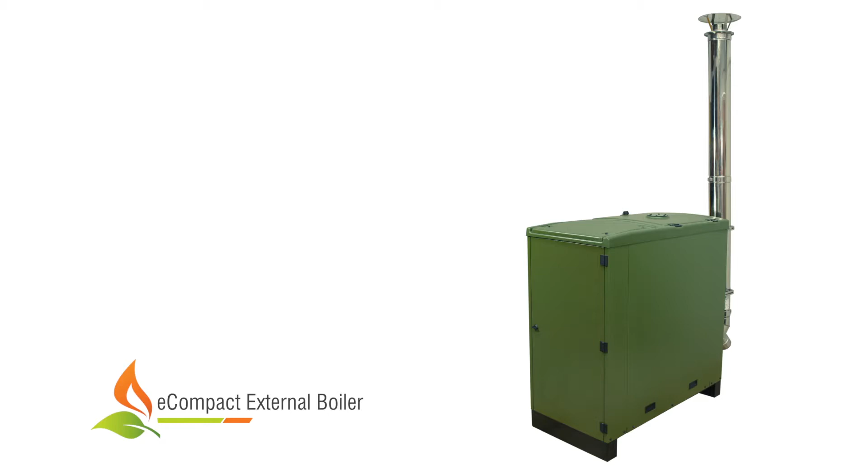Even greater range of models, i.e. 15-18 in slim models and 15-18, 28 and 40/45 kW S models. Several thousand external boilers have been supplied from WES's factory to the UK and Irish market, making it the undisputed leader in this field. eCompact, the original and the best.

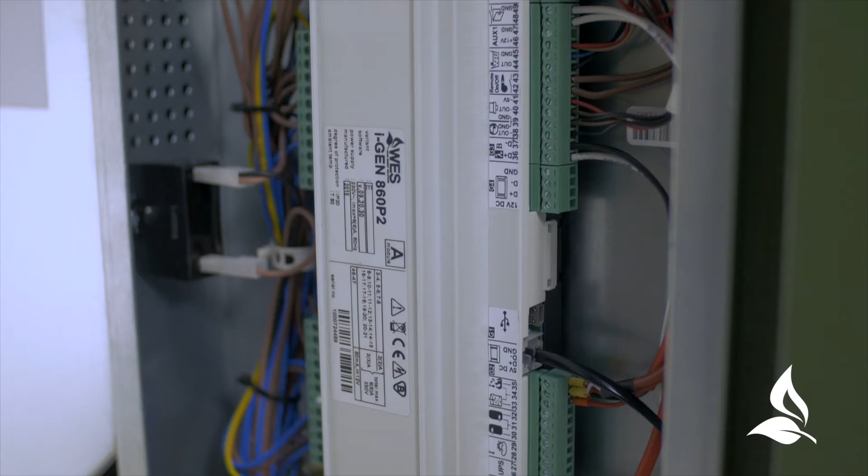This video describes the installation of the external 15 kW, but the same principles apply to all internal and external models, and the controller and key components are exactly the same on all domestic models.

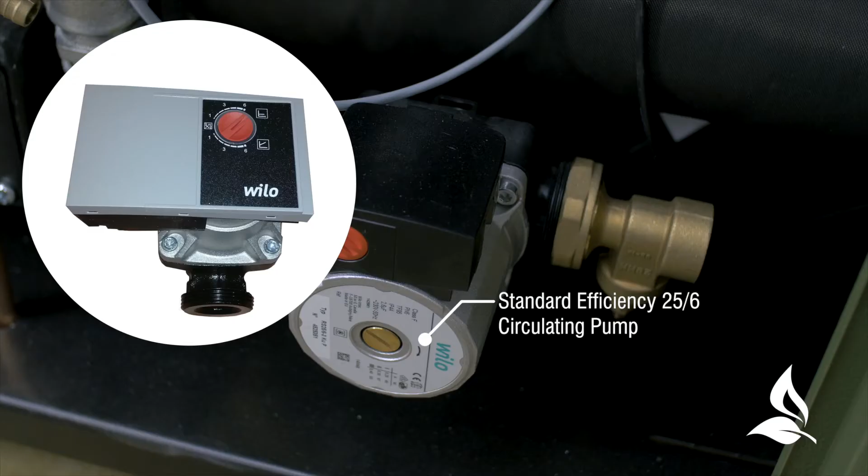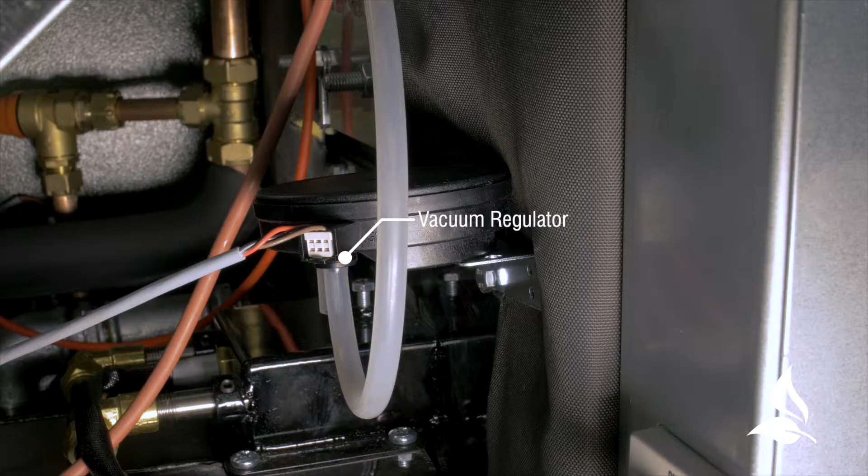Unique new features on the external iGen are easily removable side panels, easily accessible control board enclosure, a new ERP energy efficient Wilo variable speed pump as standard from August 2015, flow and return connection pipes that can exit through a knockout in the base, unique compressed air cleaning system, a vacuum regulator which ensures negative pressure is maintained in the combustion chamber. All wiring is heat resistant and sleeved.

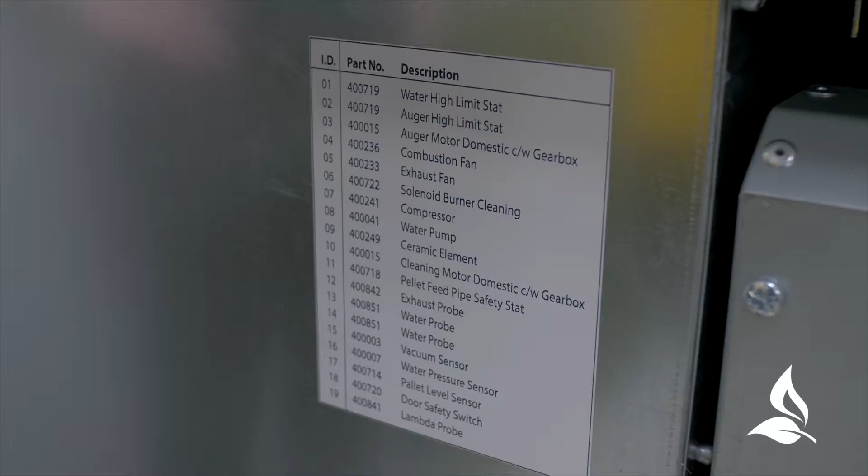Also, all components are joined by push-on connectors. An index of all key components is on the side of the boiler, making it easy for the installer to identify each component. Behind the easily removable control board enclosure is the PAT Test QC control label.

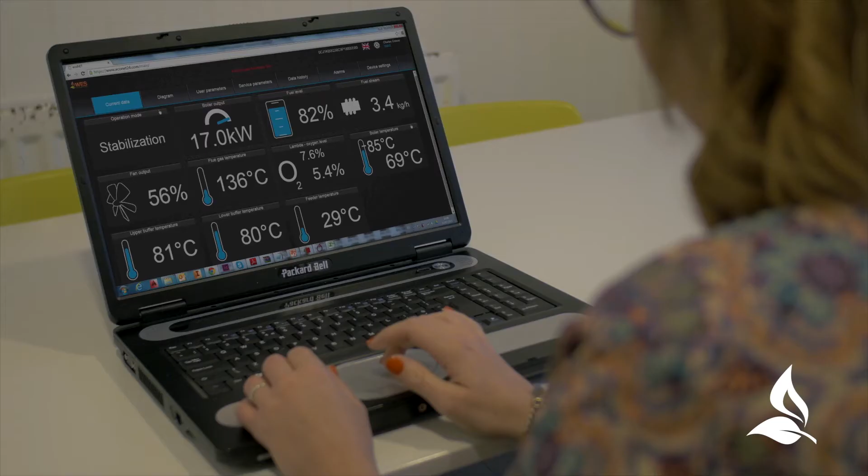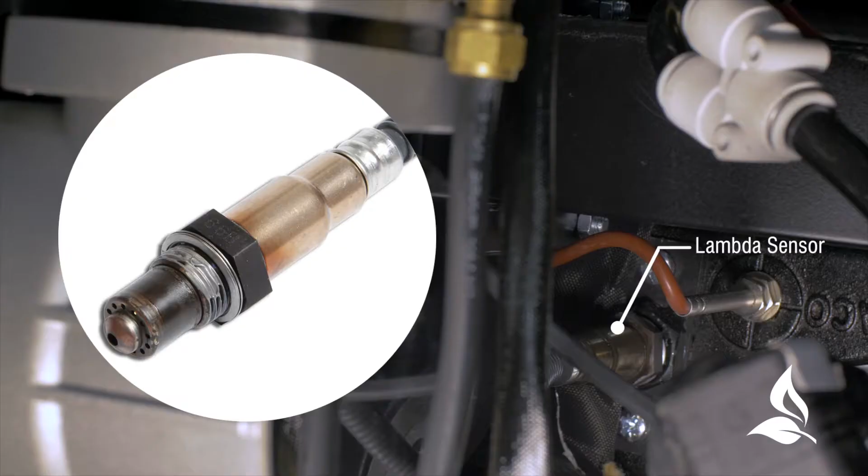Wi-Fi is standard on all models, enabling remote access for the homeowner, installer and manufacturer. There is no need for static IP address or to run Cat5 cable to the unit. All that is needed is Wi-Fi coverage in the boiler vicinity. All eCompact boilers have lambda sensor and controller as standard, ensuring even greater efficiency and quality combustion.

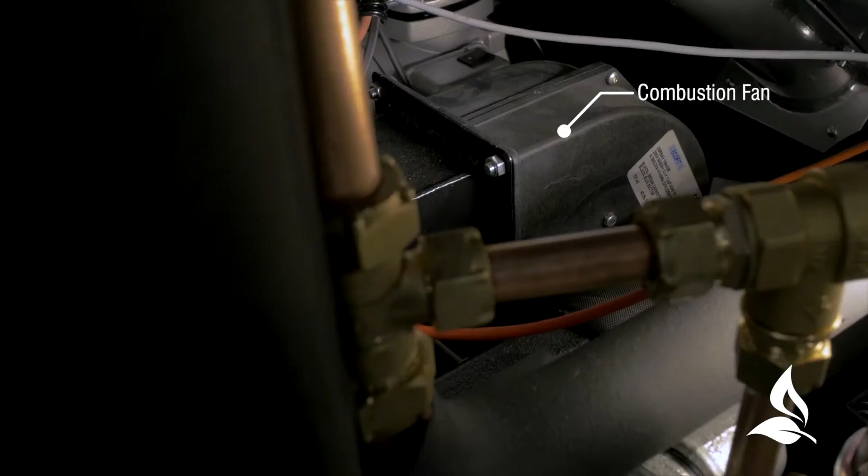A pressure relief valve fitted as standard and plumbed. Water pressure sensor which alarms if water pressure is less than 1/4 bar and exceeds 2 3/4 bar pressure. Combustion fan ensuring greater quality combustion compared to single exhaust fan systems.

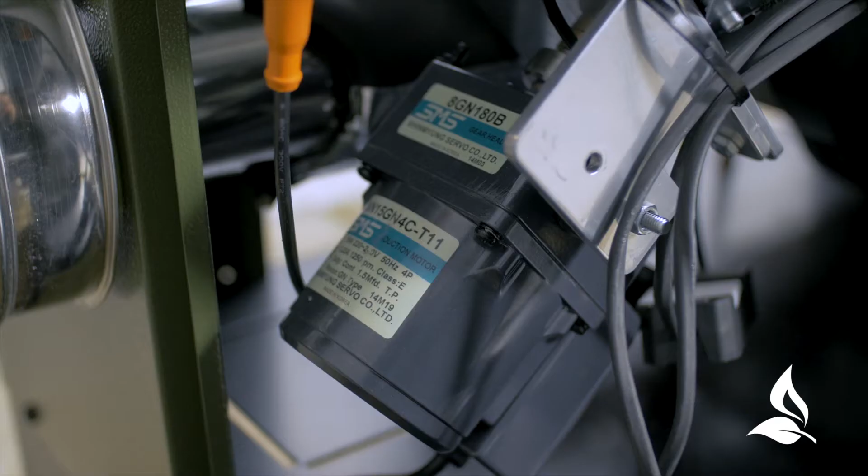Here you can see the temperature probe that measures the exhaust gas temperatures as it exits the boiler. Here is the auger motor that drives the auger flight. Each boiler is identified by a unique serial number which is located inside the front door here.

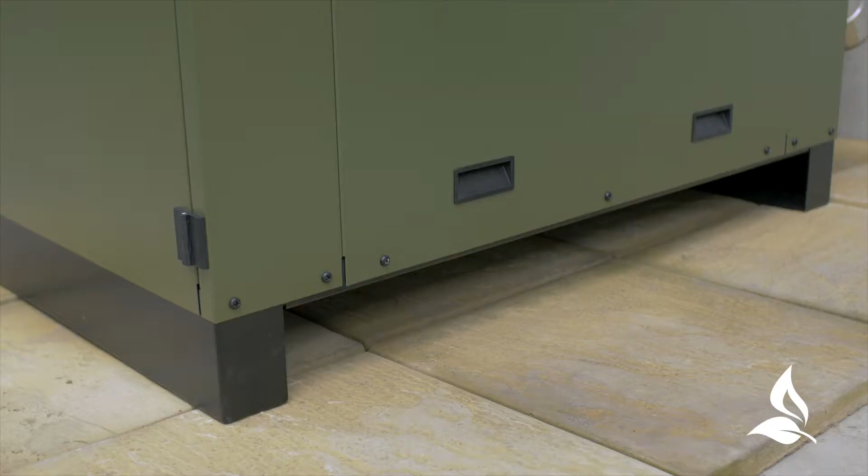Weatherproof louvers on the rear of the boiler allowing combustion air access to the unit. Air intake under base and on rear panels giving the eCompact an even greater IP rating. All external models have the patent pending moulded ABS lid with removable spigot for an external auger, enabling eCompact external boilers to be used with bulk fuel storage systems.

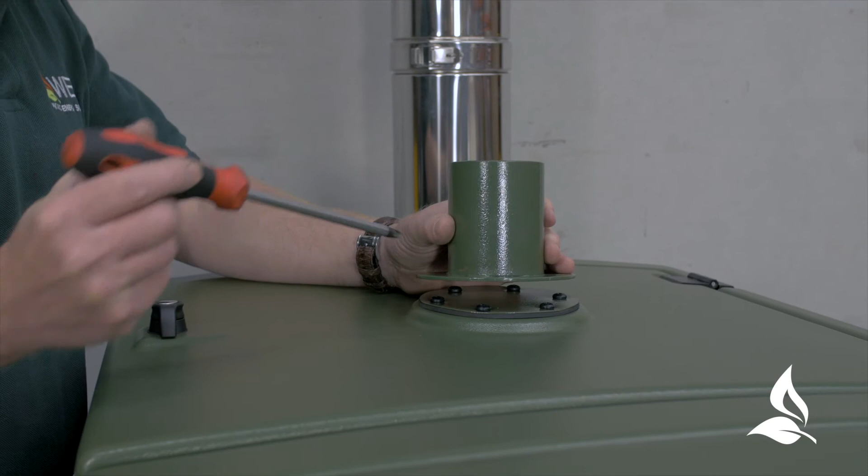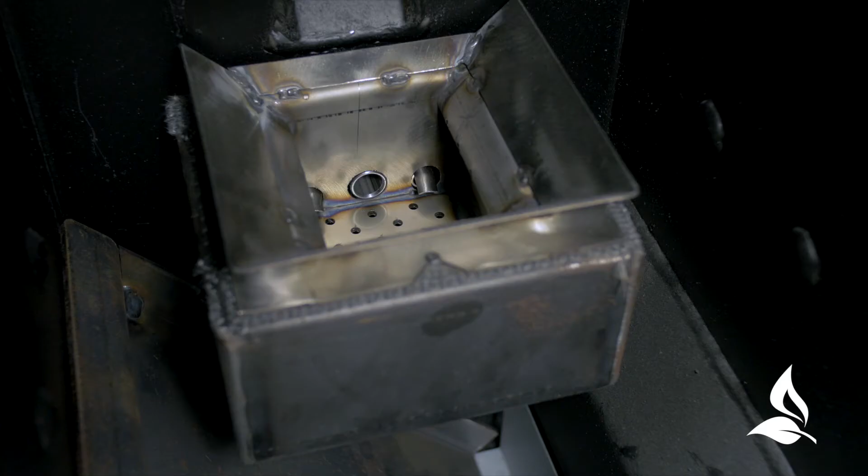Relays are factory fitted to enable an external auger to be used. Relays also allow the property's existing time clock to be used. Stainless steel safety mesh guard. Boiler on a skid base to ease transportation on site. Greater number of cleaning pipes in burner and extended cleaning time. Exhaust pipe is insulated. The main electrical connection is easily made, and provision is made in the base to bring in the electrical cables.

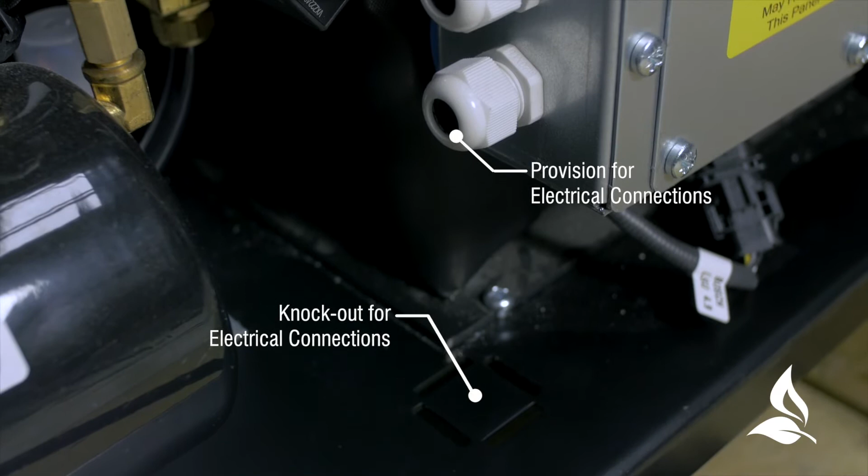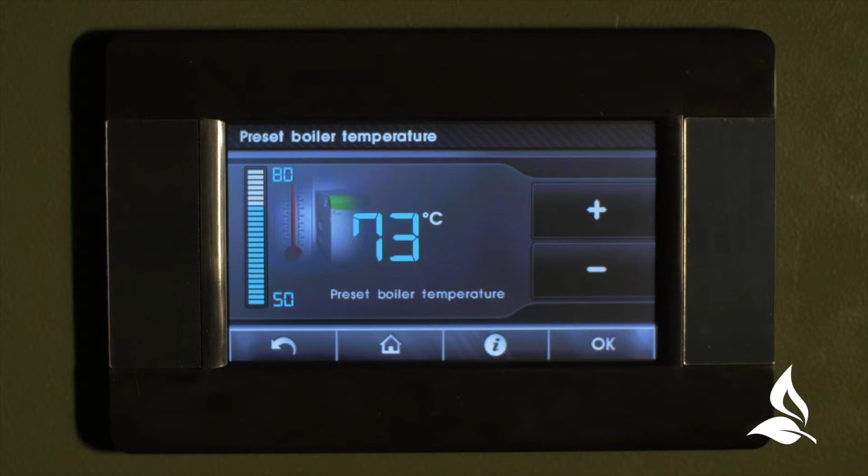iGen controller is standard on all eCompact boilers with its touchscreen easy-to-use graphic display. The iGen controller uses fuzzy logic PID control, meaning it modulates seamlessly within the range of 100% to 30% of the boiler output. Commissioning process is therefore greatly simplified. All boilers are PIN code protected only at installer and manufacturer levels to access service parameters.

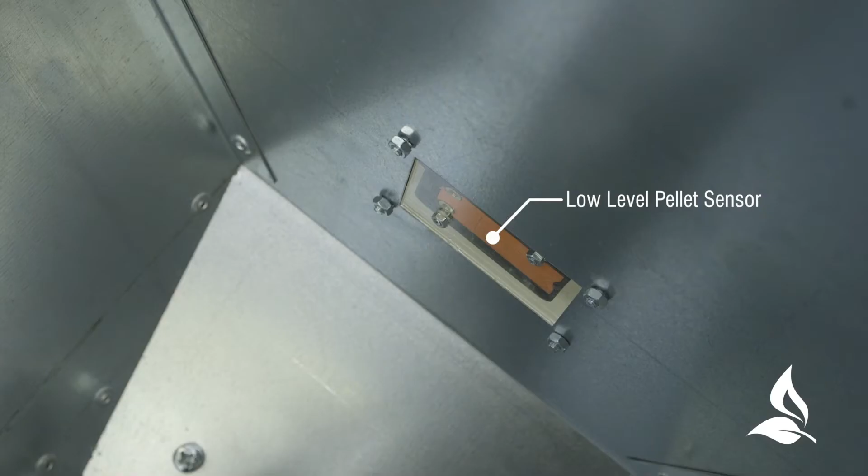iGen control module can also be sited in the property, meaning the homeowner can control the boiler from within the house. This will show the operating status of the boiler, fuel level and control heating circuits within the property. Within the hopper you will find the low-level pellet sensor and the auger flight. On opening the lid over the boiler, one will find the boiler cleaning motor and the automatic air vent.

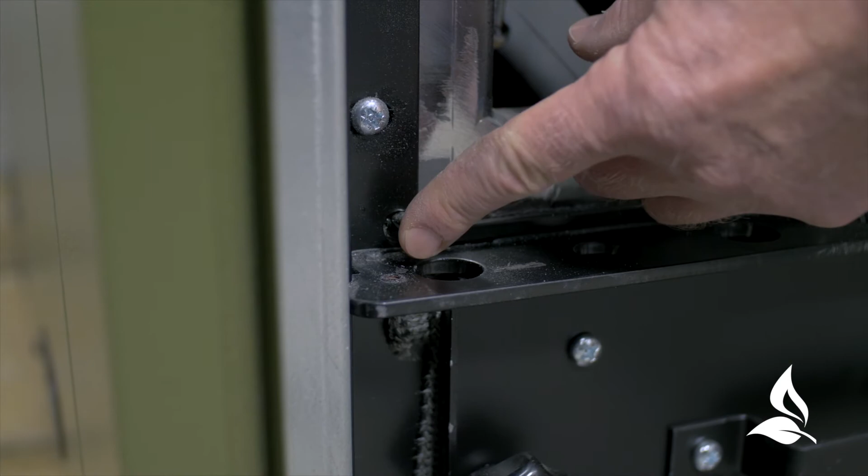On opening the front door of the boilers you will notice an additional safety catch that needs to be opened on the combustion chamber door. This is in addition to the existing electronic safety switch. You will notice the burner pot and grate which is manufactured from stainless steel. A generous ash pan is located at the bottom of the combustion chamber and a pan for collecting the debris after cleaning the heat exchanger.

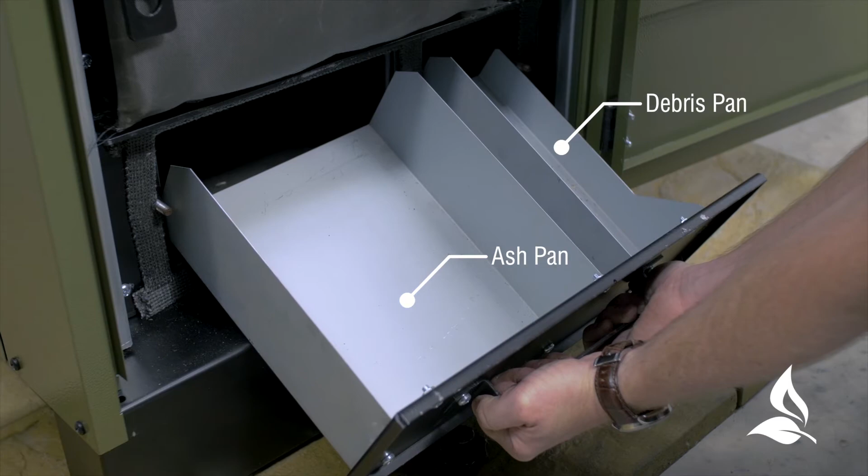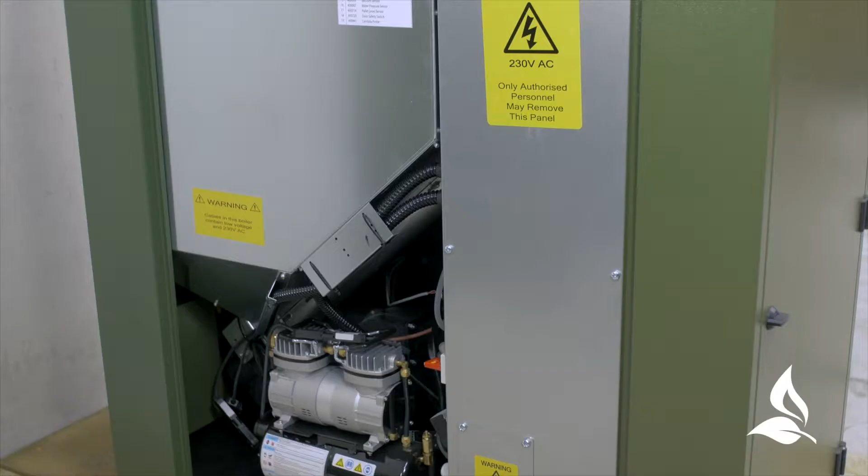The installation of the boiler, making the electrical connections, checking its operation and maintenance are all tasks which will be carried out by qualified and authorised personnel. It is important that the installation manual be read in conjunction with this video. So you can see, the eCompact iGen is one of the best designed biomass boilers on the European market today. Industry-leading components are used throughout.

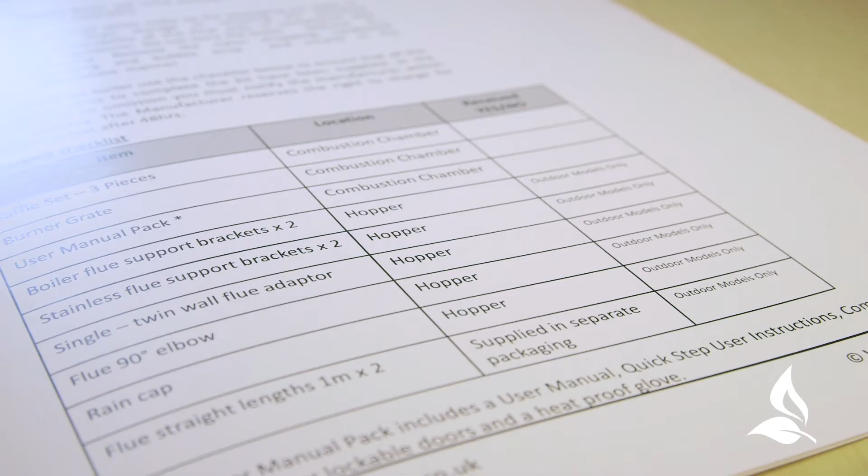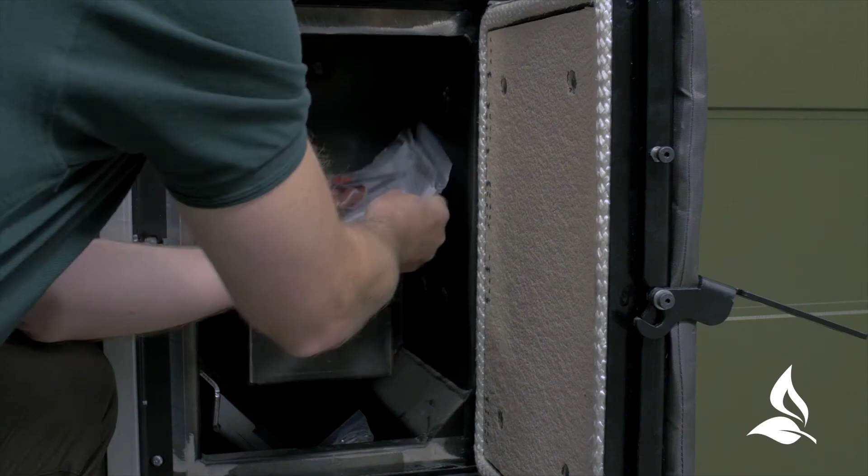Unpacking. Your eCompact boiler is supplied on a single pallet and the materials which make up the packaging are 100% recyclable. Check the unpacking checklist in the manual to ensure you have all the required components: 3 baffle plates on a 28 kW boiler, 1 baffle plate on 15 and 18 kW models, user manual pack, burner grate, etc.

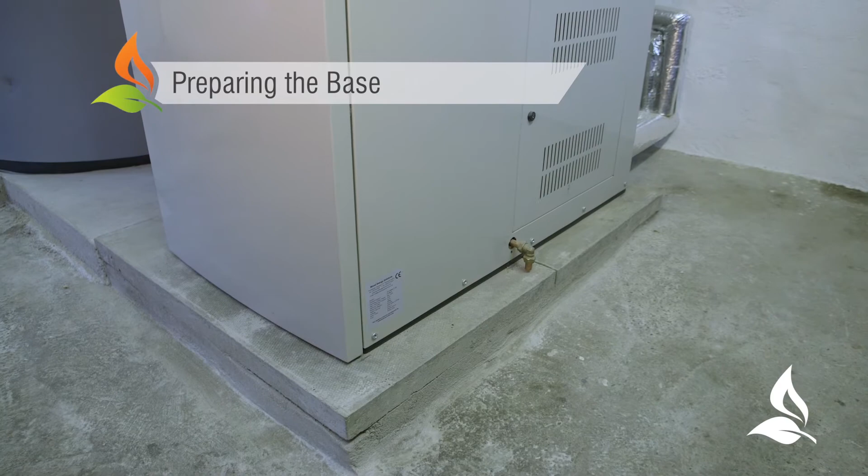All eCompact domestic boilers are designed to fit through a standard door width. However, they do need careful handling, and you will need manual handling equipment. For example, the 28 kilowatt model weighs almost 200 kilograms. Preparing the base. For internal boilers, there is already likely to be a non-combustible concrete or tiled base in the plant room where the unit is to be placed. For external boilers, it may be necessary to install a base.

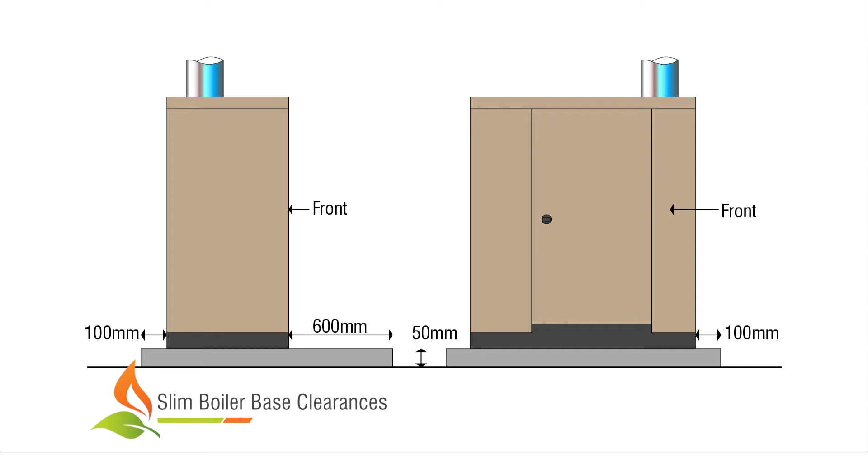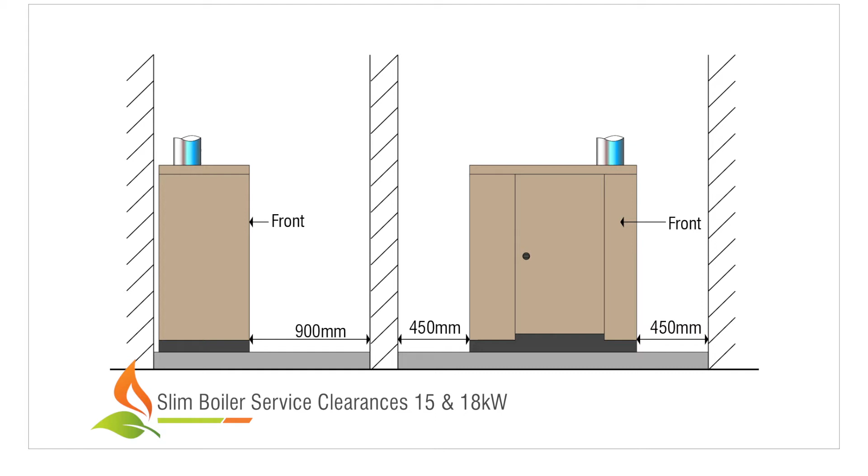The base needs to be 50 mm high and should project a minimum 100 mm beyond the sides of the boiler, and at least 600 mm to the front of slim boilers. On the 15 and 18 kilowatt models, the installer must leave enough space so that the user and service engineer can access the boiler routinely.

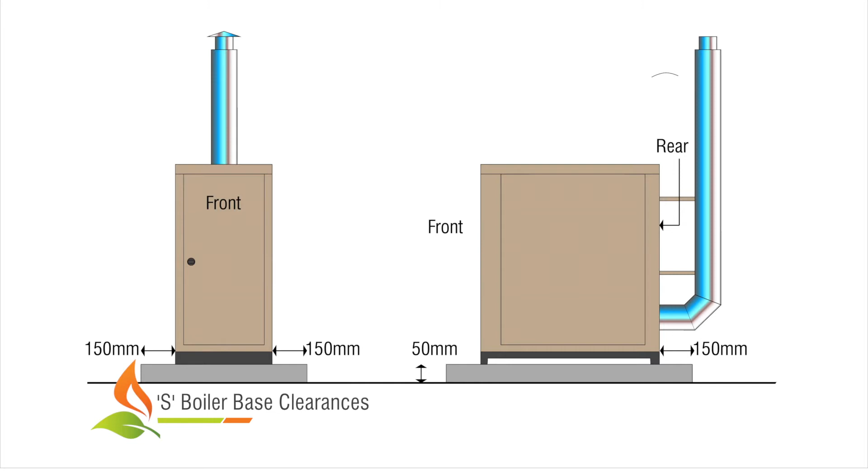This means leaving at least 900 mm at the front of the boiler and 450 mm at either side. For the S model boilers, the base needs to be 50 mm high and should project a minimum of 150 mm beyond all sides of the boiler. Service clearances must be at least 900 mm to the front and 450 mm to the rear and both sides of the S model boilers.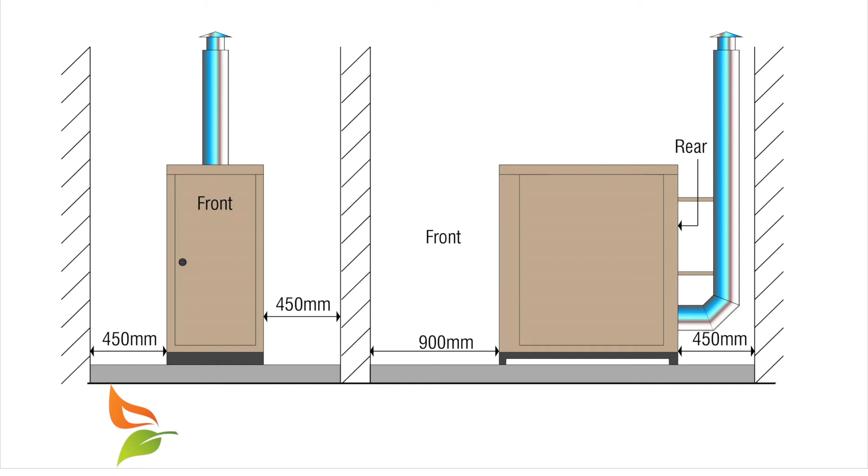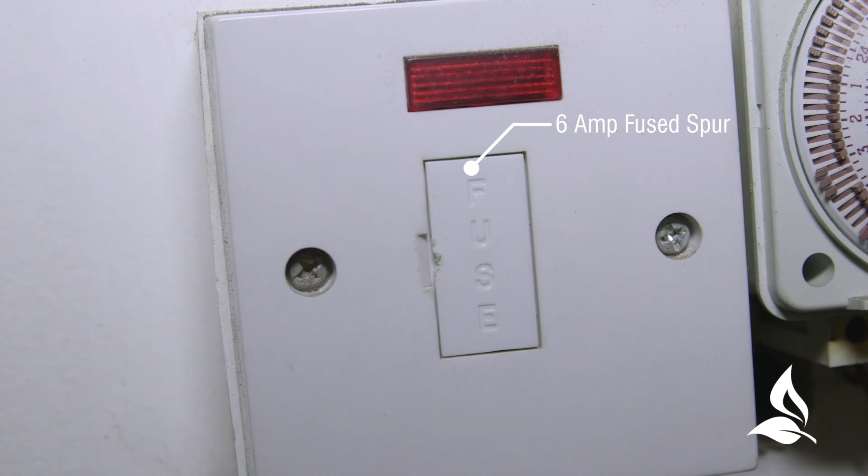Electrical connections. A certified electrician should carry out the electrical connections. The eCompact boiler must be supplied with a 230 volt 50 Hz electrical connection via a 2-pole isolation switch rated for over voltage category 3. It must be protected with a 6 amp circuit breaker. Also, the unit shall have a 30 mA RCD installed into the main supply.

Room thermostat shall be supplied controlled by extra low safety voltage. A 4-core cable needs to be connected to the boiler. Black is permanent live. Brown is time clock or controlled live. Blue or grey is neutral. Green and yellow is earth. The appliance must be connected to an electrical system which is equipped with an earth conductor complying with CEI 64-8.

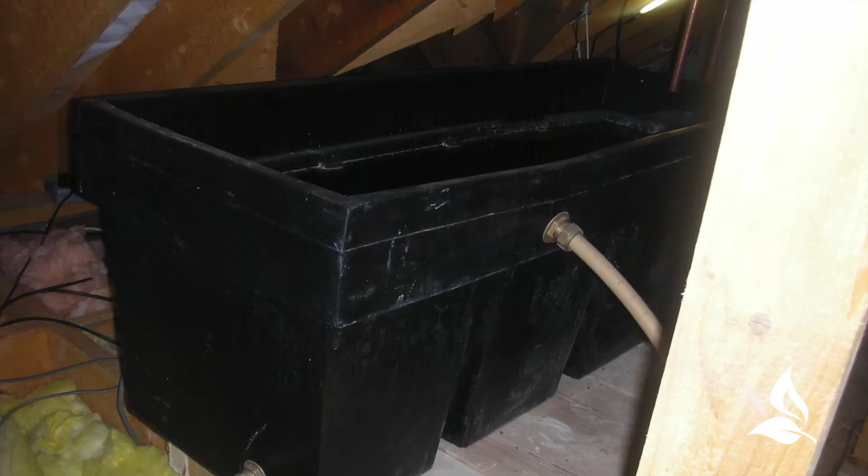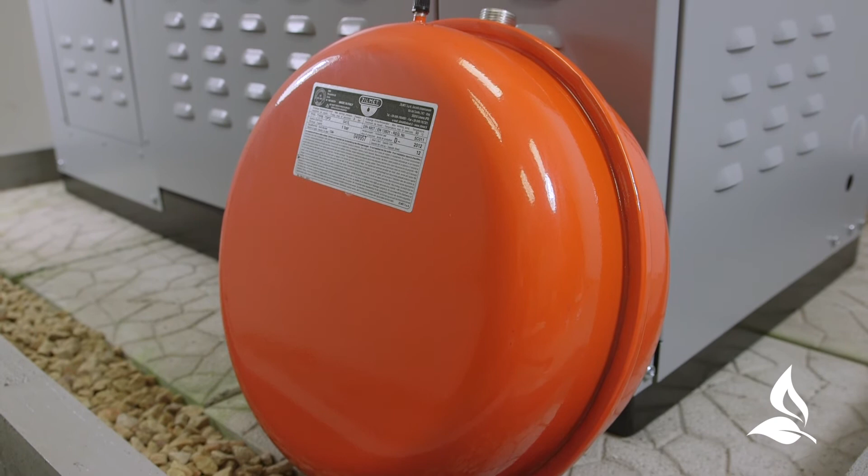Water connections. The flow and return connections are on the right hand side of the boiler. The boiler can be plumbed into either an open vented or sealed pressurized system. The maximum static head on an open vented system is 27.44 meters. If on a sealed system, the expansion vessel must be installed as per the manufacturer's instructions and based on the water capacity in the boiler and the entire heating system.

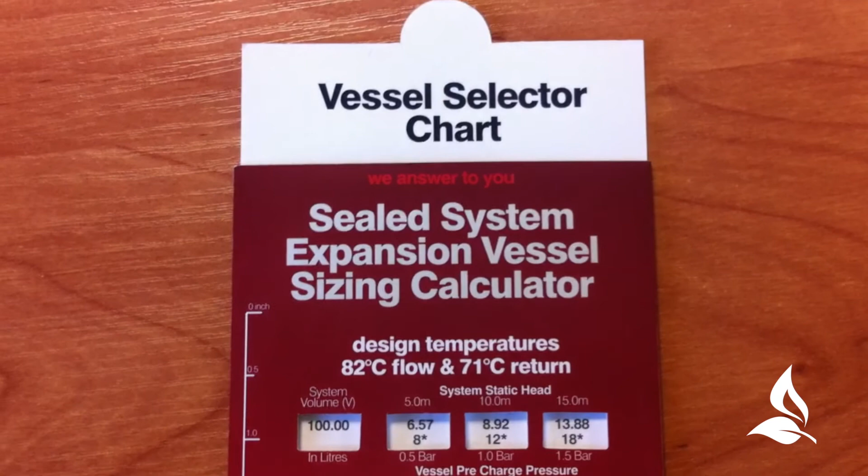Failure to size the expansion vessel correctly may cause the boiler to leak over time and invalidate your warranty. A minimum 18-litre vessel is recommended plus additional expansion for the heating and domestic hot water.

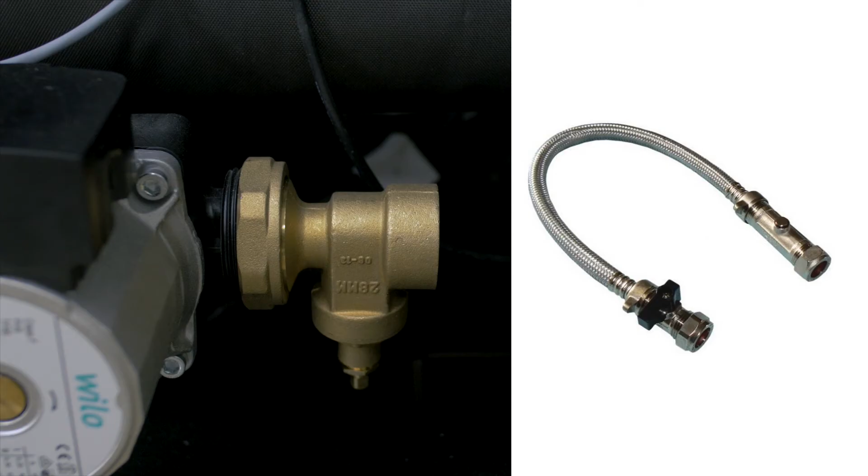The boiler is fitted with an energy-efficient variable speed pump. The system should be filled from the lowest point on the heating system to force the air to the highest point where it can be vented. To de-aerate the system, enter the manual control menu and activate the pump. Repeat the procedure to turn off the pump.

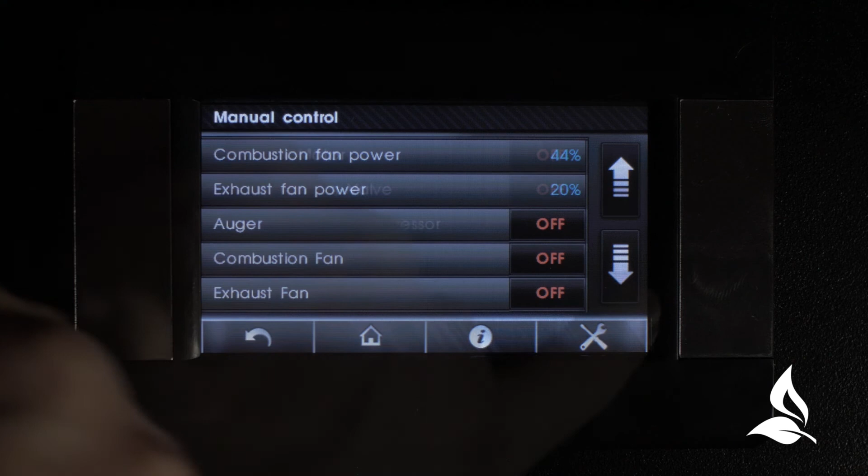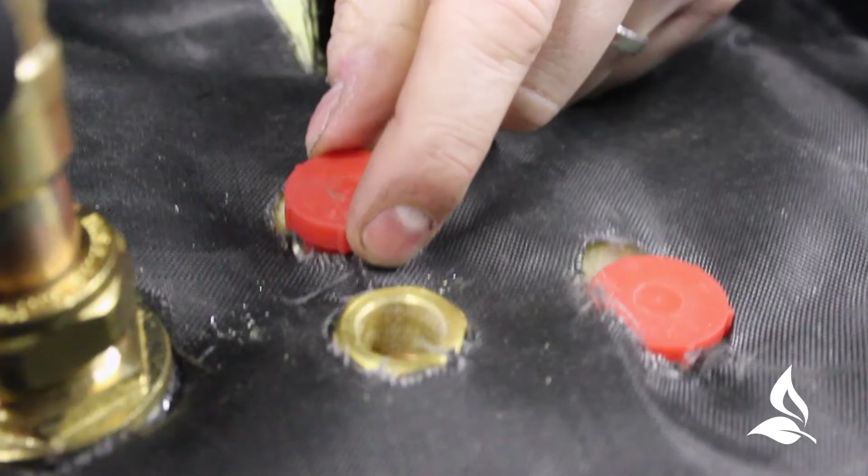Only when the system is fully vented can one commission the boiler. Always ensure the fittings are tight and sealed when filling the boiler. Remove any red caps and blank with plugs if not used. It is important that there is sufficient heat leak on the system to absorb any latent heat from the boiler and to prevent nuisance tripping of the boiler overheat thermostat.

This is something first-time installers of biomass boilers often overlook. The boiler can still generate smouldering heat within the combustion chamber even after the unit is powered off.

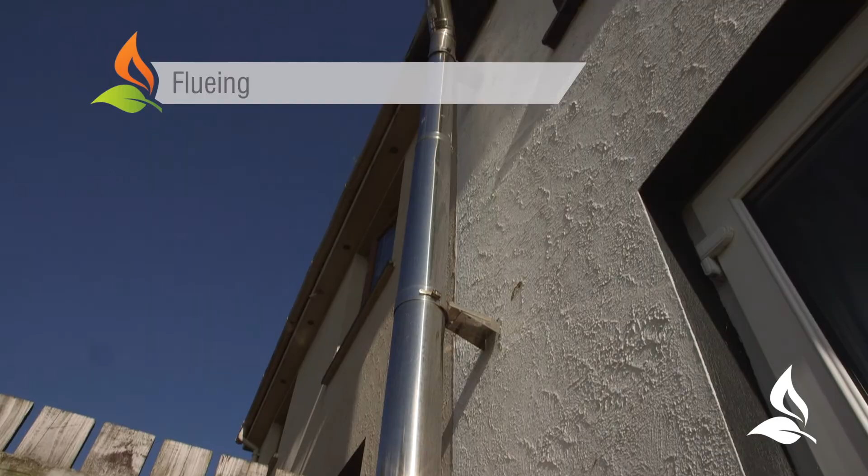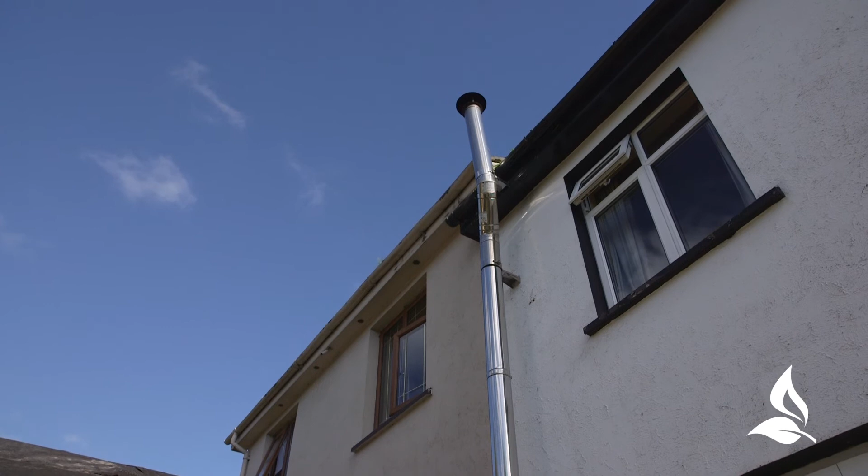Flueing. Flueing of the boiler is an important consideration and must comply with Part J of the UK building regulations. In summary, for internal boilers, the flue must terminate at least 1 metre above the eave of the roof. If the boiler is an external boiler, the flue must terminate at least 1 metre above the eave of the roof if located directly beside the building or within 3 metres of the building.

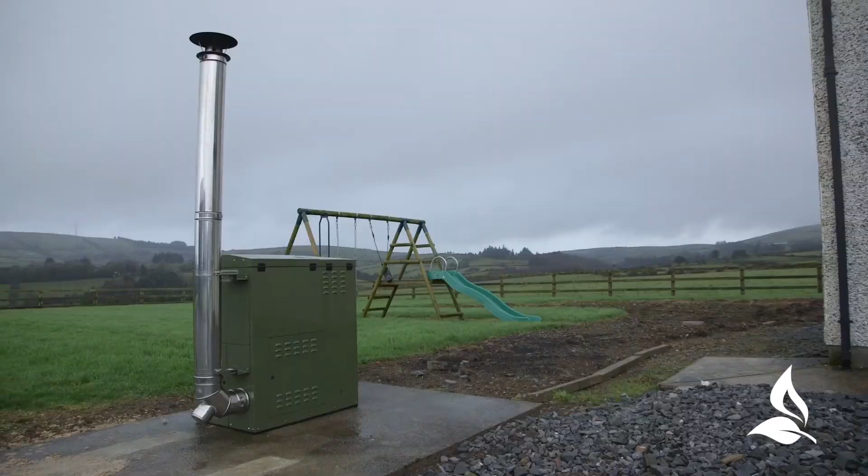Otherwise, if the external boiler is located further than 3 metres from the nearest building or tall structure, the standard shorter flue can be used provided the boiler can run satisfactorily and achieve a draft of 20 pascals. Sometimes an anti-downdraft cowl or spinning cowl may be required. When commissioning, we will show you the importance of draft and how the vacuum regulator assists this.

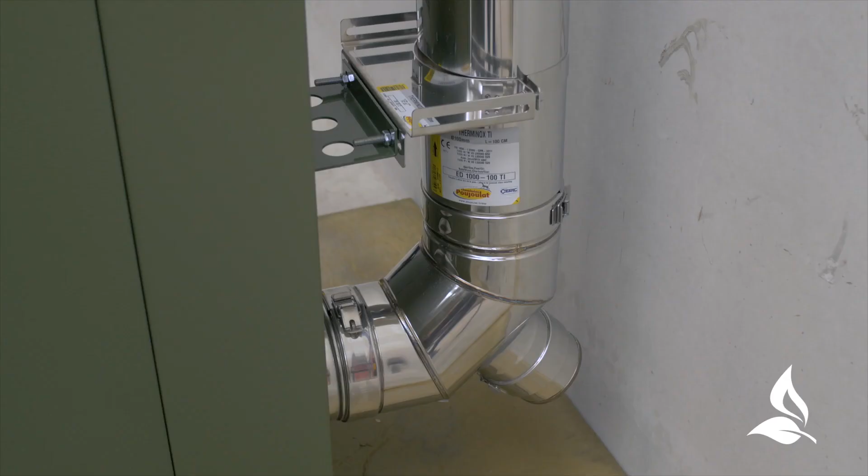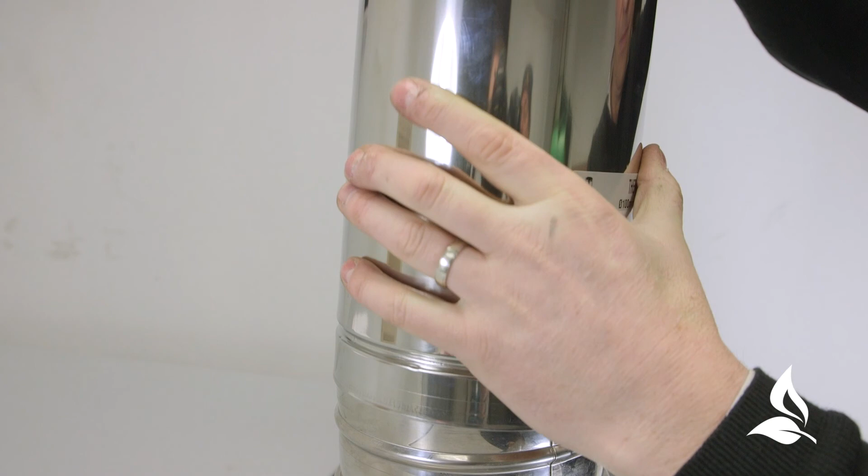The flue pipe must not include any horizontal pipe runs. It is also advisable not to exceed 8 metres of vertical pipe. eCompact biomass boilers have an 80mm diameter transition pipe from the exhaust fan to the flue adapter. eCompact boilers have been tested and approved with 4-inch 100mm twin-wall stainless steel insulated flue, so you will need an 80-100 adapter. The installer can also choose to use a 5-inch 125mm flue.

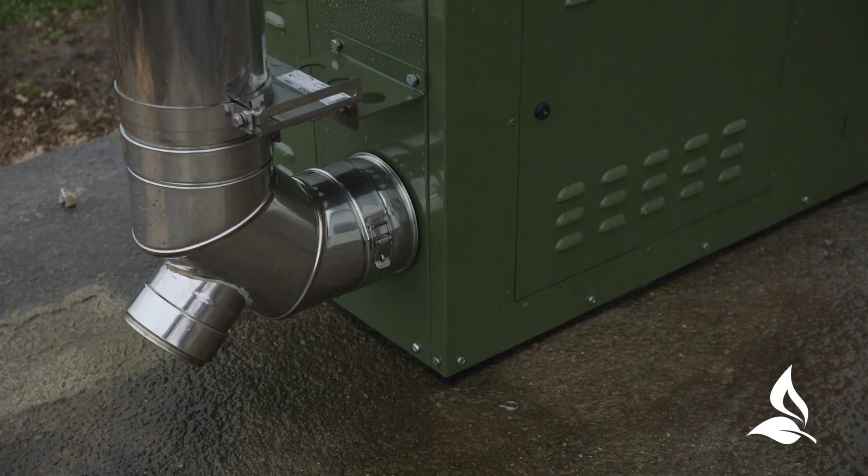It is important there are no other 90-degree bends used on the flue system apart from the 90-degree elbow at the rear of the 28 kilowatt boiler. A cleaning hatch or way of removing a piece of flue to enable annual cleaning of the flue needs to be provided at any 90-degree bend. A full range of straight, offset, elbow and T-elements are available from Wood Energy Solutions.

For boilers located indoors, external ventilation by way of louvered doors or vent must be provided.

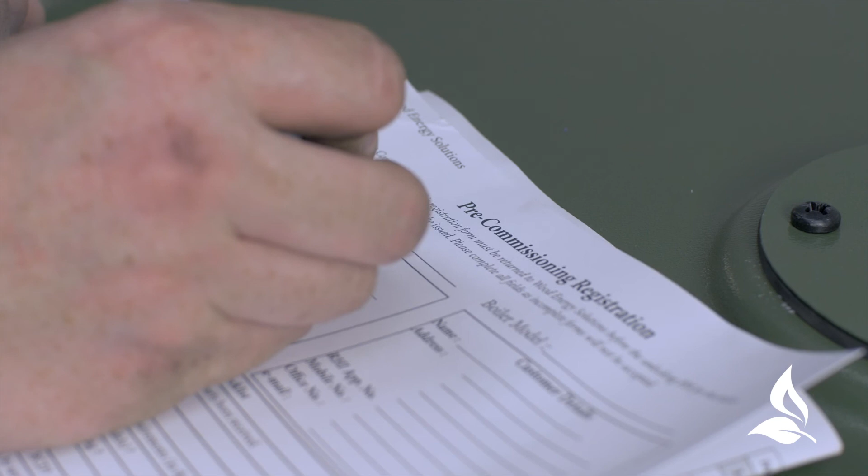Once the installer has primary plumbing connections completed and the boiler is ready for commissioning, a pre-commissioning registration form must be completed and returned to WES. WES will check that the form is complete and that the installation is ready for commissioning. Once WES is satisfied, it will issue an unlock PIN code to the commissioning engineer.

Once the boiler has been commissioned, a 30 minutes handover to the homeowner must be done, and the homeowner will sign to confirm that they have received and understand the instructions on how to operate their boiler.